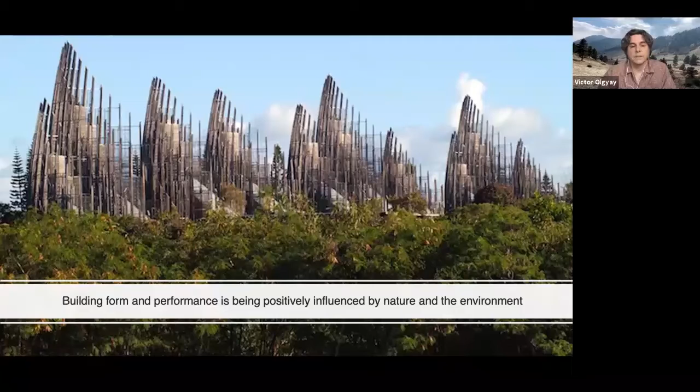Buildings have started to really be positively influenced by nature. We see lots of exciting architecture coming that is formally influenced, that has higher performance, that basically is a kind of evolution, in some sense, from this mid-century modernism, when we're understanding how we can actually take advantage of those connections. But that's not all, really. And individual buildings still can have issues.

This is actually the building where my office is. I haven't been in there for a few months, but Boulder Commons, it's about a 100,000 square foot office, and it's a net zero energy building here in Boulder, Colorado. And you'd think, oh, it's a net zero energy building. That's great, and it is. But it also can have negative impacts, and I'd like to talk about that a little bit.

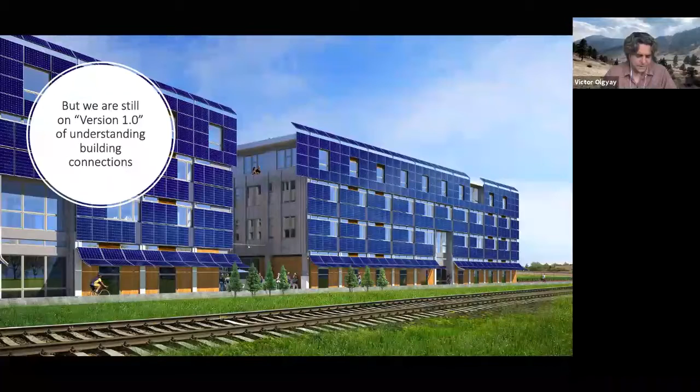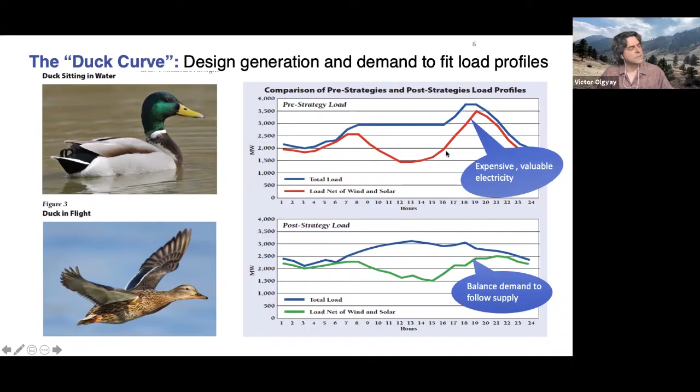Overall, it's a big opportunity for us to balance our building demand to follow supply. So it's operating your building effectively to ensure that you're not causing more problems. So this red line is really sometimes what we see as an issue with net zero energy buildings. And what we're saying is that those buildings need to be a little bit more aware of their connections to the larger utility grid.

So here's another way of looking at this concept. And when we start to connect to the utility grid, we sometimes call these grid interactive efficient buildings, or GEBs. And what GEBs do is they have buildings work as an extension of the utility, as an asset to the grid.

So this might seem just like a nice thing, like, yeah, let's be nice to the grid. But it really can have huge impacts in terms of our funding. We did a study for the GSA, the General Services Administration, the nation's largest landlord. And we showed that there could be around $100 million in annual cost savings, basically about a third of the GSA's annual energy spend, with less than a 4-year payback, just by taking some of these grid interactivity things into account.

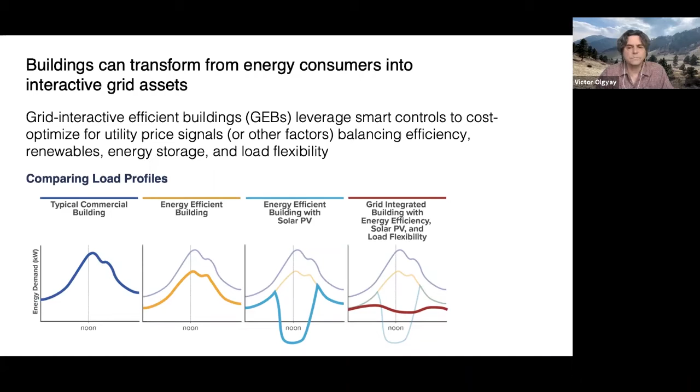So there's resiliency benefits, there's benefits in terms of reduced carbon costs. There's just a lot of quantitative measures as well as general benefits. So let's take a look at this quickly. It can be a source of income. It can help the grid run more smoothly and provide all kinds of different services to the grid. Things even like frequency regulation, spinning reserves, but really that demand flexibility and storage piece is the key right now in terms of costs and being able to make money off of it.

And then in addition, it can also help with the decarbonization of the grid. And these grid services are just one part of the overall architecture. And I think a lot of times people think of solar buildings or green buildings as a separate type of animal, as it were. But really, the key is going back to the Ray and Charles Eames thing of integration, right? It should be part of this synthetic way of looking at things. And that's the way the most benefits happen, both to the occupants, the different stakeholders, and also to the architecture itself. So take that integrated design approach.

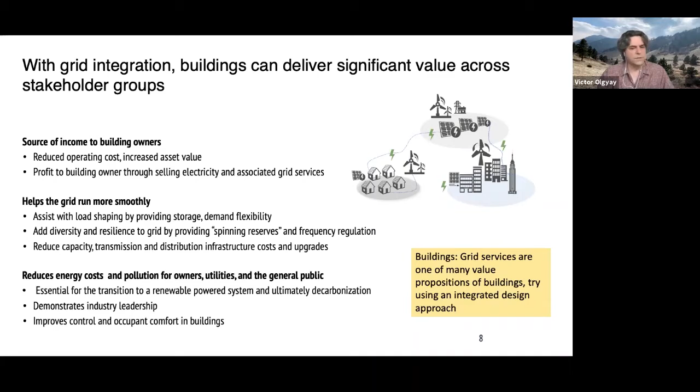So we can actually operate our buildings in a way that by when you purchase the electricity, you actually are purchasing lower carbon electricity, and you can influence the amount of carbon on the electrical grid. This comes from WattTime, but there are other players as well in this field. And it's a really interesting thing to try and coordinate the emissions along with the demand side.

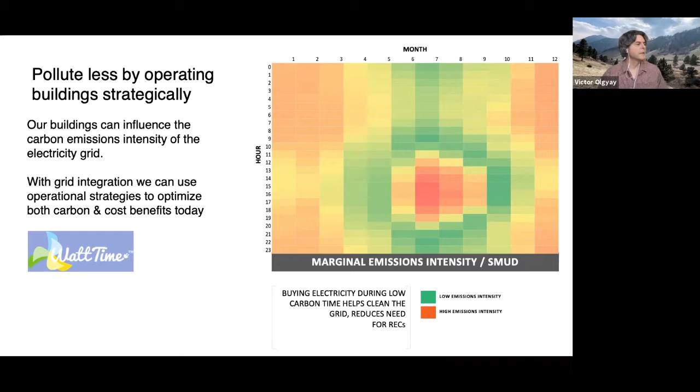So the cost and emissions don't always coincide, but you can get 80, 90% correlation and really optimize for both of those concerns. So how does this apply to us? Well, we can actually take individual buildings and put them together into communities, as is obvious, and then try to optimize the performance of those communities.

So how do we talk about these connected communities? Well, grid interactive and efficient, so they can kind of modulate their energy use. They connect with these other grid services. So not only do they do it, but they actually work with utility, have different kinds of distributed renewable energy generation and storage and so forth. And then they are optimized over the group of buildings.

So it's not just 20 buildings, each one individually kind of working, but it's building A and B working with building C and D in order to optimize across those smaller sets of buildings to even further get benefits in terms of flexibility and renewable energy generation. Sometimes they employ shared systems, especially thermal plants or energy storage. And that often helps if it's a geographically contiguous system, but it can also happen through a portfolio of distributed buildings as well.

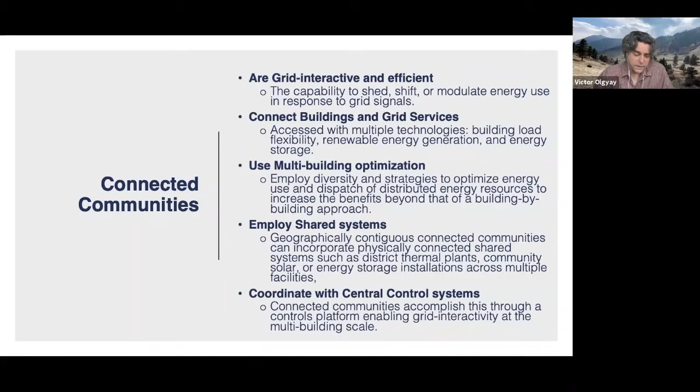And then finally, the issue of having smartness or intelligence and data connecting these buildings is critical. And this is starting to become an area where we see a lot of development, with these different control platforms that enable this multi-building grid interactivity and optimization. So not all connected communities have all of these things, but most of them have a few of them. And we're going to take a look at a few of them.

So I've got 9 case studies that I'm going to go through. Some of them are really short, some of them are a little bit more detailed, but they all talk to different aspects. We'll talk about connecting to site resources, to grid services, connecting buildings to refurbishment cycles over time, so when to actually do renovations, connecting to mobility, and then centralized resources with Hazelwood Green.

So the first 3 are kind of residential. And you might know of this project, which is here in Colorado, Fort Collins. It's a nice little residential project, pretty much completed. It's a new development, market rate, and net zero energy. So they basically have highly efficient buildings with solar PV, as well as with ground source heat pumps. The site plan is pretty dense. It's a mixture of single family houses with row houses and multifamily buildings.

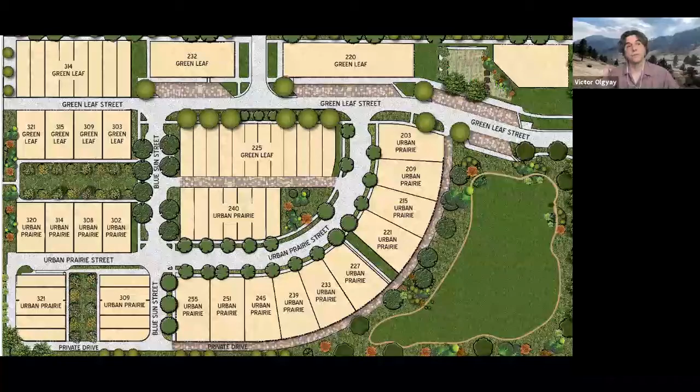It's got pretty good performance. They, I think, are typically a negative HERS rating. So those of you who know about the home energy rating system, most codes require you to get a certain level of efficiency based on a HERS rating, depending on the size of your house and so forth. These are negatives, which means they're actually producing more energy than they use over the course of a year.

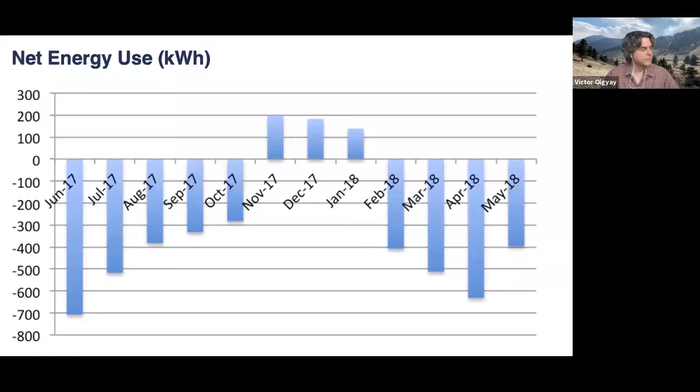This is actual data from a couple of years ago. And you can see it's using a little bit of energy in the wintertime, but basically the rest of the year it's producing more energy than it's using. So I think it's a negative HERS rating of about 8. Not huge, but definitely better than net zero.

And then the economics actually work out well also. So with the increase of cost that's required to get these buildings to net zero, increased insulation, better windows, air-to-air heat exchangers, things like that, there's some cost associated with that. And that got rolled into the mortgage payment, with solar and some other things. And the increase in the mortgage payment is actually less than the overall amount of energy savings over the course of a year or a month.

And I think this is a critical point, that a lot of times we look at costs either on a first cost basis or on a very short-term basis or isolated from the other benefits. And I think a lot of times we can make all of these high-performance buildings very cost-effective by looking at it in a more integrated approach. And I think as architects, that's our strength, not necessarily the engineering side of it, but the idea of starting to understand how we can make these connections across different disciplines in order to make things pencil out.

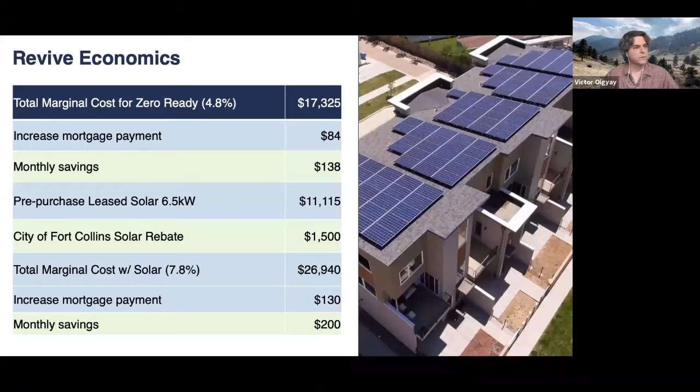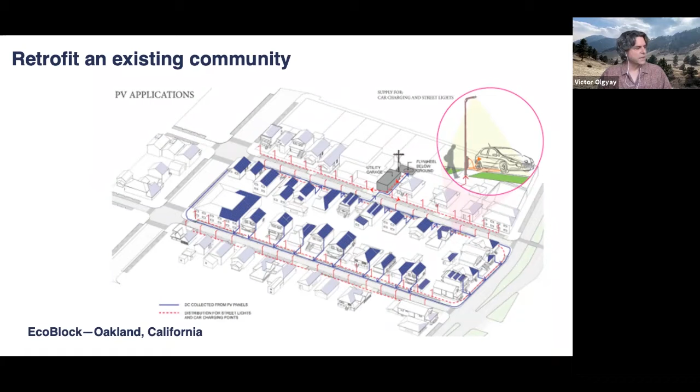Take another look at an existing community here. This is EcoBlock in Oakland, California. It has not been built, but it's a really interesting study of taking typical blocks in California and adding distributed solar PV with some centralized resources, in this case, energy storage. Similarly with water, there's a kind of ganging of the water systems, rainwater catchment, and also with the wastewater.

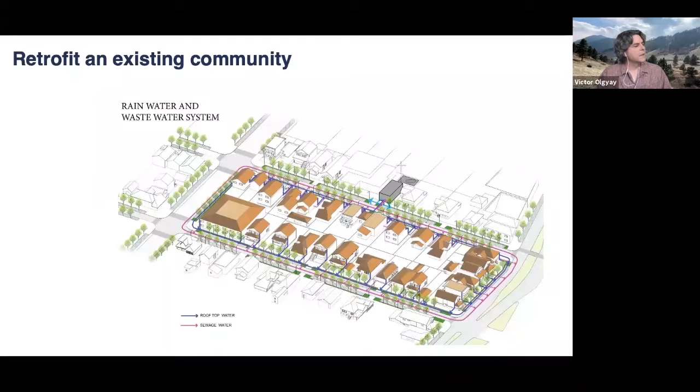And then these all get folded together into a community where you first reduce all of the loads through efficiency and insulation and electrification, but then you're also able to add in additional things like charging for electric vehicles and other centralized energy storage and so forth. And so by doing this in this larger context, it can be done quite cost effectively.

And again, I think what's critical here is this is being applied to existing communities. Since we have such a large number of existing communities, it's critical that we start to understand how we can apply a lot of these smart, connected approaches to that infrastructure that we already have.

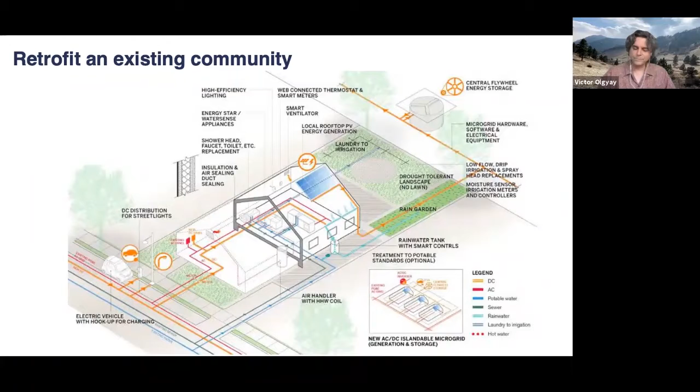Now, this last residential community group, I think, is my favorite at the moment, which is up in Basalt here in Colorado. It's being built. They're super affordable. I believe Habitat for Humanity, there's many of them. And they're pretty straightforward. They're just really high efficiency houses with heat recovery ventilators and cold climate heat pumps. They have PV on them, and they have battery storage, EV chargers, and so forth, a lot of fairly standard stuff.

The part that's really interesting is that they also are connected with a system. I think Holy Cross is the utility up there, and Holy Cross is trying to get their electricity grid to be decarbonized as well. And this is part of it because they can shift loads with these buildings because of the storage and because of these controls, and basically help balance their grid. Now it's a small amount, right?

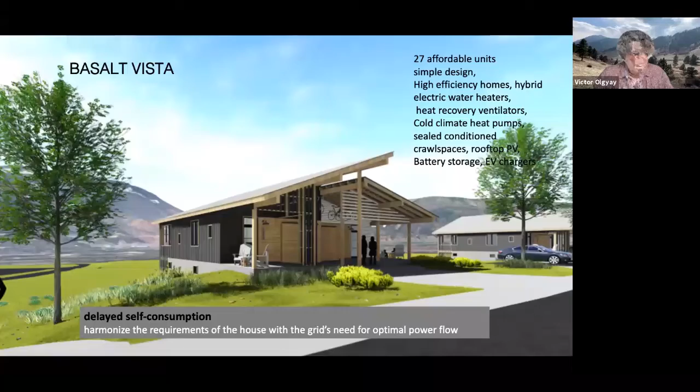These are 27 units out of, I have no idea how many buildings they have in their system, but this is a way of starting to have these buildings be a positive, interactive grid asset, a distributed energy resource, and it's able to use these houses, this residential development, to harmonize with the larger grid. I think it's a really good example of what we can imagine coming more in the future.

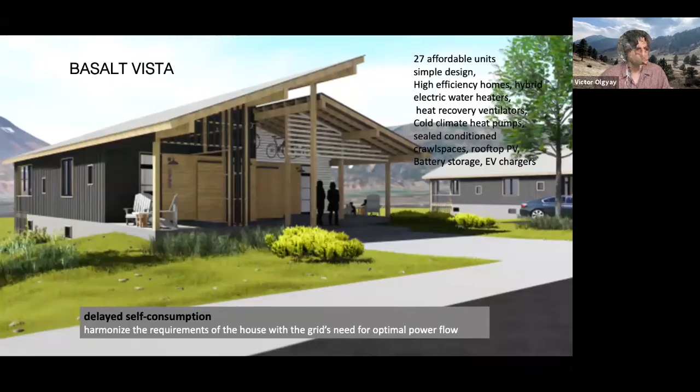So I'm going to now start to talk about some of these other grid services. Here's two projects that are in process. Pena Station is one that many of you probably know as you've driven to the airport. It's this big covered parking lot that is pretty visible, and also is a great place to park if you're going away on the plane. And you can plug in your vehicle and it'll be charged when you get back.

It's also got a large microgrid there, and it's particularly interesting because the support through the batteries and the solar and the microgrid was enough that Xcel Energy was able to avoid the capital cost of building an electrical substation because of all of this other grid infrastructure. So all of the interesting bits that we've been talking about in terms of buildings as an asset to the grid are manifest here quite explicitly.

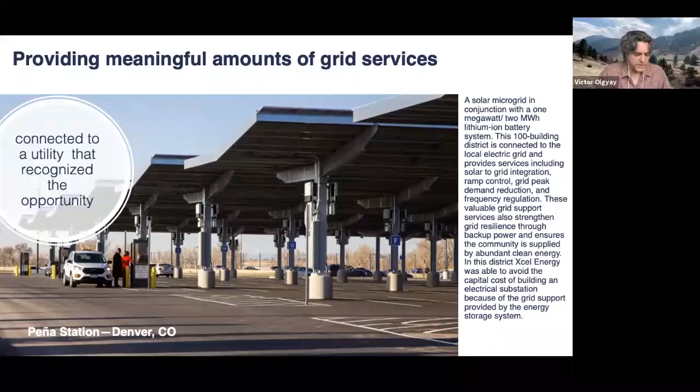These are what those batteries look like. There's, I think, about a 1.5 megawatt PV system and 2 megawatt hours of lithium ion batteries here that you're seeing. It basically is providing clean energy. As you know, they're building out a lot of the residential communities behind there. I think eventually it's probably about 400 acres and 100 buildings or so.

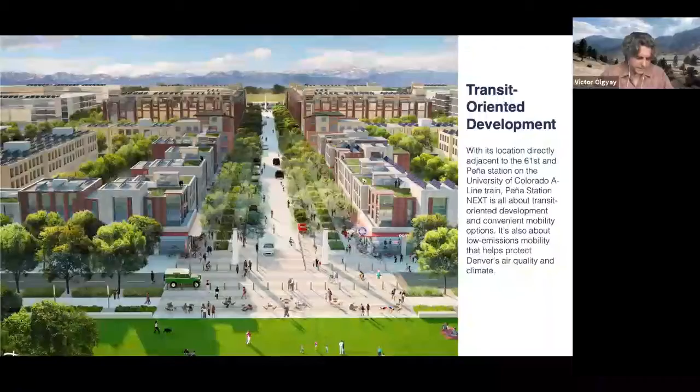And it's a transit-oriented development, which ends up being, of course, critical. It's nice that there's a light rail stop right there. Of course, if anybody was flying, you could fly from there. And you can get downtown very easily as well. So walkable and lots of good public services available. And transit is critical, making that connection.

In Georgia Tech, there's this Georgia Tech Flex project, which is just going on now. DOE, NREL, and Rocky Mountain Institute are collaborating on this along with Georgia Power. And the idea is to take, again, 18 existing buildings and start to understand how we can optimize their energy use, both for benefit to the client, Georgia Tech, but also for benefit to Georgia Power, the utility. And so it's quite interesting.

One of the things that's coming up as an important issue is that those buildings have diversity. So there's some buildings there like the Kendeda Building, which is a net zero Living Building Challenge certified building, very high performance. And there are other residential buildings that are fairly typical dormitory type buildings. There's classrooms, labs, all kinds of stuff. And the diversity of loads actually helps us think a lot about how these things can get balanced out.

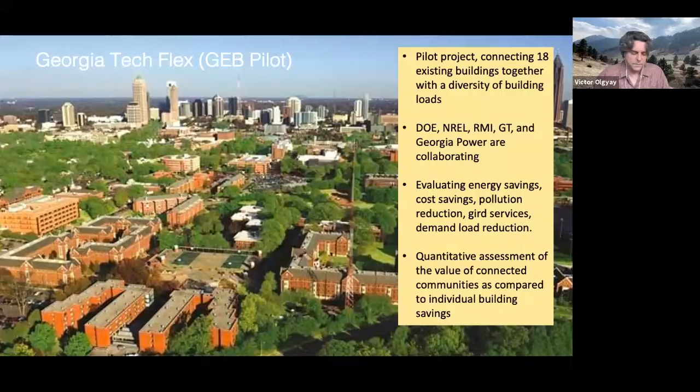Zero over time is, I think, again, an interesting way of thinking about existing communities and how can we make them part of the solution. So the idea here is that we have so many existing buildings, and how can we actually retrofit them most cost effectively? So one approach to this is to look at buildings when there is actually a need for capital investment of some sort.

So oftentimes when a lease turns over, you're going to go ahead and do some tenant fit out, or if it's sold, there's oftentimes changes that happen, or if there's some larger capital improvement that's necessary because of a system failing, and needs a new water heater, you need a new roof, whatever it is. Those are also times to start thinking about efficiency and building that in.

So if you plan for that, as your building ages and suddenly there's a new tenant that comes in, or there's a need for a major equipment replacement, and you've planned for that, then you don't replace that piece of equipment with the same thing, but maybe you actually are able to electrify your building at that time and go with a heat pump, or maybe at the time that you're doing the tenant fit out, you can actually go ahead and insulate walls or switch out for better windows.

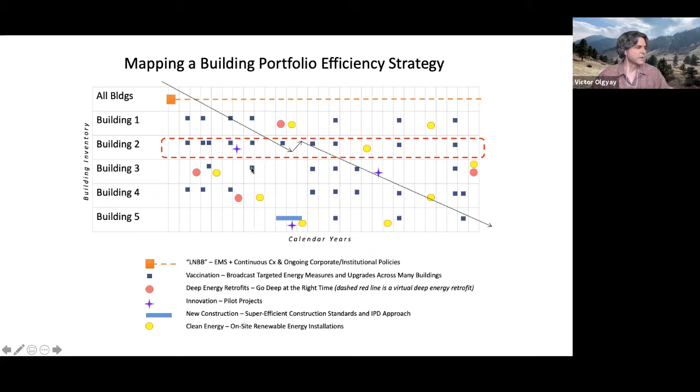So here at Arizona State University, they have these really ambitious goals, getting to climate neutrality by 2025. We worked on this project about 5 years ago, so they're well into it now. And they wanted to get to climate neutrality by 2035. So they took this approach of looking at zero over time and understanding when there was a building that would be a deep energy retrofit, when we're going to add solar, when we're just basically going ahead and doing some regular upgrades. And over time, we were able to show that this would be the most cost-effective way to do it.

So this first bar shows business as usual. The second is no energy efficiency, just adding renewable energy as you move along. The third one is doing all of those things of efficiency and so forth, but not necessarily coordinating it with the end of life of our equipment or other kinds of trigger events that allow for efficiency. So if we look at that zero over time scenario, we found that that's actually the most cost-effective, more cost-effective than business as usual, and also gives you a positive ROI, net present value. So it really makes a lot of sense.

Of course planning is typically a good thing, but especially when you've got a large campus like Arizona State University, and you're trying to have these big goals of getting to climate neutrality, and you want to do it cost effectively, you can actually design your building infrastructure and maintenance to be coordinated with your climate goals in such a way that it actually benefits both of those. So it's a very nice way of doing it.

Last thing I'd say about ASU is that they're doing most of this through an energy service provider model. And so what happens is the energy service provider has a guaranteed cost and return, and they basically have first right of refusal on these projects, and be it a renewable energy project or a building efficiency project, they can go in there and they can make money on it at the same time as ASU is benefiting as well by reduced costs and reduced pollution.

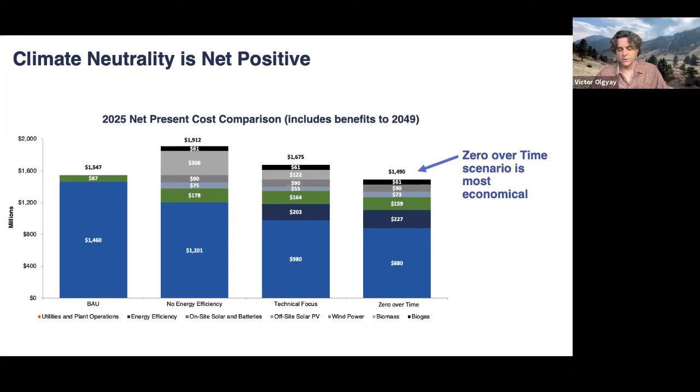We've also applied this to some work that we've been doing with the city of Pittsburgh. They also have fairly aggressive energy goals, in this case wanting to get their municipal buildings to zero carbon by the year 2030. So be it for better or worse, they have a big portfolio of, I don't know, 150 or so municipal buildings that are really not in a great state of repair. So they all do need to be invested in. And the question is, how much can they invest at what time?

But what we tried to do is, again, coordinate that investment with efficiency improvements, and also require that they don't do it based on kind of lowest first cost. They really want to be able to do this based on a life cycle cost. So we ended up with a scenario that looks like this, where this top slightly sloping line indicates the business as usual case, right? That would be essentially how much CO2 would be produced with marginal improvements in efficiency.

You're switching out lighting, or when a rooftop unit fails, you're putting in kind of the typical model. So there'd be slight improvements, but really not getting anywhere near what they needed to get to by 2030. This bottom sloping curved line is actually trying to coordinate efficiency improvements, and this is bringing the buildings essentially up to net zero ready, which we defined through the Architecture 2030 standards, which AIA has also used in terms of efficiency for the energy use intensity for all of these buildings.

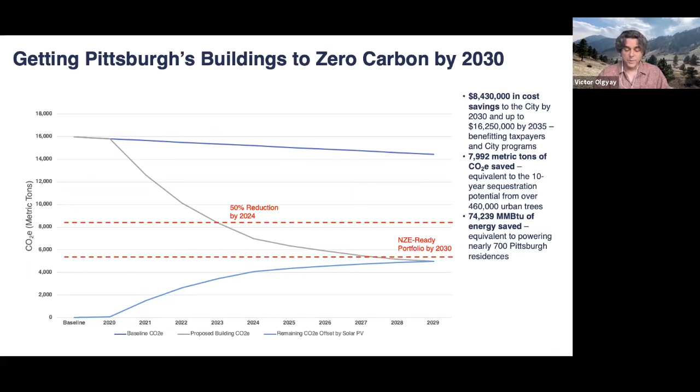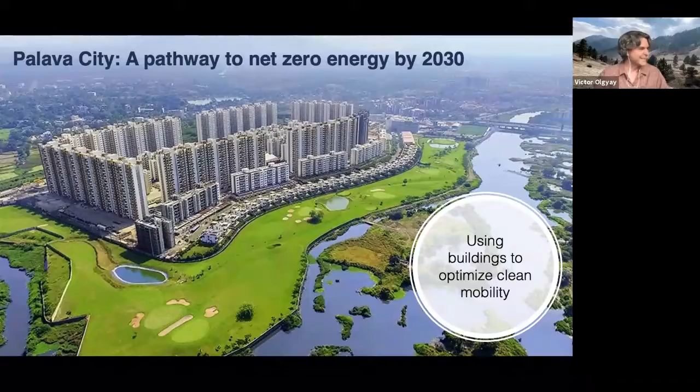Two more projects I want to talk about. This one in India is really interesting, especially because mobility ended up being a surprisingly big impact for me when we were working on this. So this project, you'd think, wow, that's some kind of Corbusian nightmare, but it's actually a lot better than much of the infrastructure there. And it turns out people in India don't like commuting any more than the rest of us. And being stuck in the traffic in Mumbai is just something you don't want to have to do on a daily basis. So if you can reduce the amount of commuting that you need to do, that's really great.

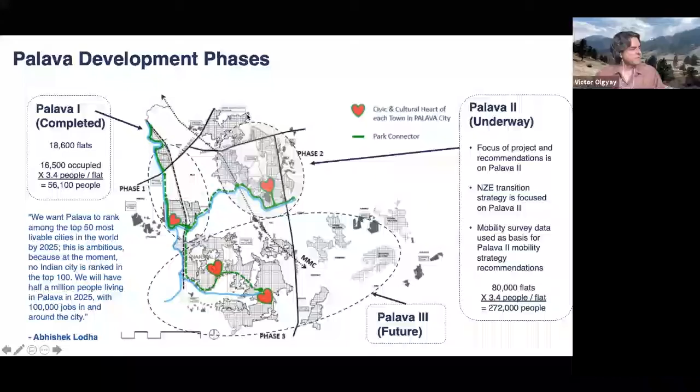This new development is about a 4,000 acre new city that's being built pretty close to Mumbai. It's almost kind of on the suburbs of it. And it's just being built out really rapidly. It's got 3 phases to it. The first phase is complete. We were focusing on the second phase, and the third phase is on its way. They own all this land. And so the focus of this was on the second phase.

And in the second phase, we looked really at the urban design and how this can actually become a better, more transit-oriented, sort of low-impact development. And so a lot of these things are not particularly surprising. I think they're things we all know about, but what was surprising again to me was the impact.

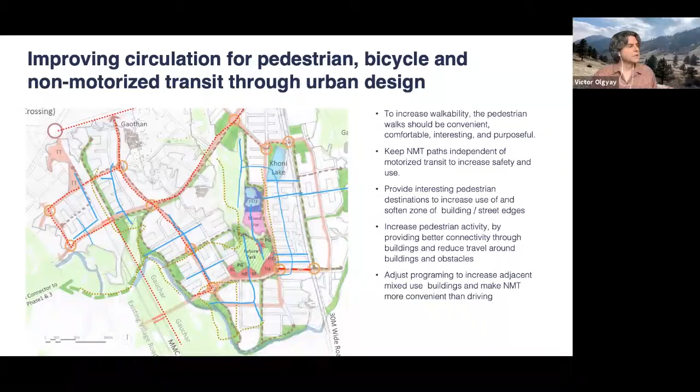So, we made nice pedestrian walkways. We basically tried to reduce the amount of motorized transit. We had more electrification of vehicles. We just made it more convenient. And from a programming perspective, we tried to have as much work and residential work-live spaces as possible. So we kind of tried to make it a self-contained place to a large degree that didn't require leaving Palava.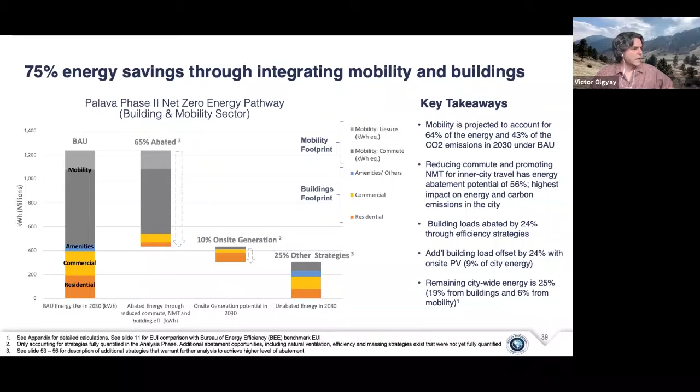So this is showing first overall the amount of energy that's used, and this gray bar is the mobility, and we were able to reduce that mobility significantly. And then we're also reducing the energy used for commercial and residential buildings, added on-site generation, and we were still left with some other strategies that needed to be employed. But mobility is more than half, like 64% of the energy use and CO2 emissions. Well, 43% of the CO2 emissions.

So here's the approaches that we took in terms of mobility. Increased walkability and bicycling, more layout of the city that improves the non-motorized transit. Lots of electrification of vehicles, both the three-wheelers and two-wheelers, as well as the automobiles, providing charging infrastructure and so forth, providing better long-distance commuting into the city for those people that needed that.

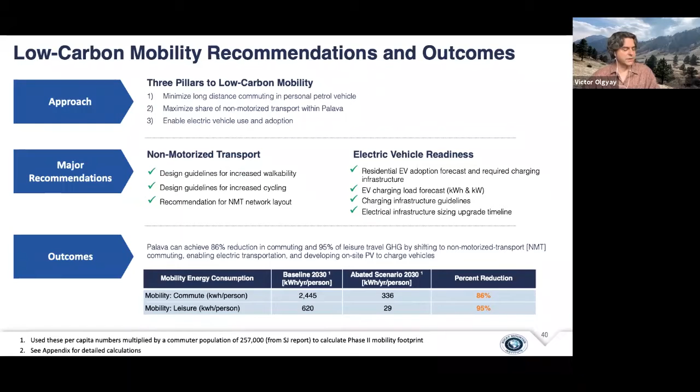And we were able to predict leisure mobility coming down by 95% in terms of the amount of pollution, and a lot of that's through electrification, and the commuting coming down by 86%, and a lot of that has to do with the work-live kind of scenarios. So we reduced the amount of commuting that was required.

Last idea here is this one here in the US, Pittsburgh, Hazelwood Green. And Hazelwood Green is really kind of exciting. It's a 180-acre former steel mill site, so a brownfield site. And they wanted to do this mixed-use development, but they're really frightened about the first costs, and they're concerned about making it affordable for Pittsburgh. Pittsburgh is not Denver. It's not a place that has skyrocketing real estate prices. So the economics are a lot different.

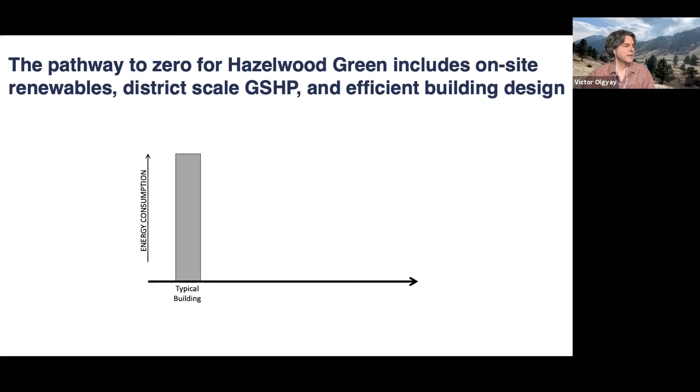So yeah, we were told it was unachievable. What we ended up doing was looking at a centralized utility on this site that allowed us to share some of that infrastructure. And we'll talk about that integrated energy service provider. So basically the way that we did this, it's pretty straightforward. That's a typical building, and we added renewable energy. We had this district system of ground source heat pumps, and then we had building efficiency, and that gets us to our net zero approach.

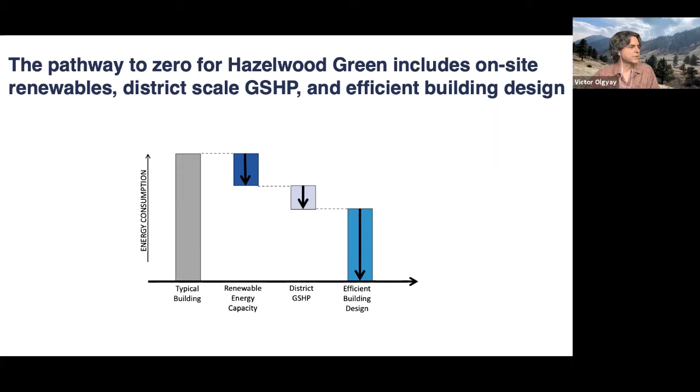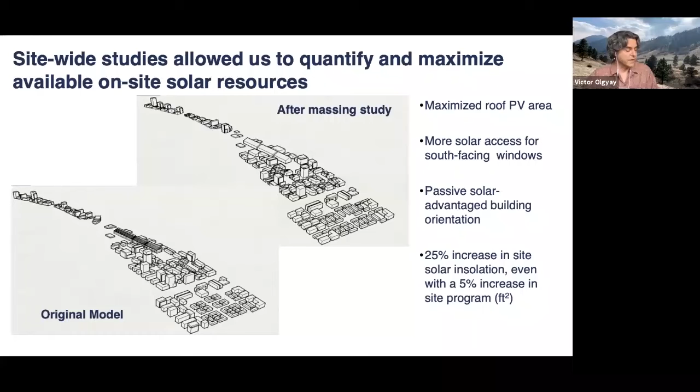We looked at the building massing, and these two massing diagrams may look very similar, but by actually doing solar orientation and envelope design, we were able to increase the insolation, basically the sunlight available on rooftops and on southern facades, by about 25%, while simultaneously increasing the density on the site. So this is to try and prove that idea that it really does make a difference from an urban design perspective, how you're shading or not shading your buildings. That's something that, as designers, we can have a huge impact on.

When we looked at all the different parcels on this site, there were some that never would be able to be net zero, tall buildings with small amounts of solar. And then there were some that would easily overproduce, parking garages and so forth. So overall, it looked like it would be possible to have an energy balance across the site. And what we did was we found places where buildings produce more energy than they need, other areas that used more energy than they produced, and basically you move the energy around. So this is that sort of connection. And if there's even more energy than we need, that can also benefit the adjacent communities.

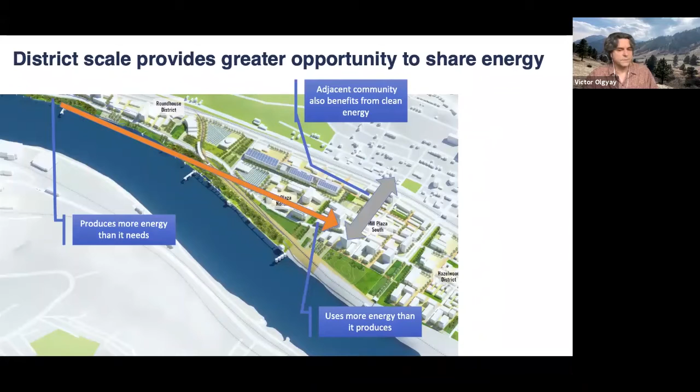So understanding that from a thermal as well as an electrical perspective was key to making this cost effective. So this idea of the IESP, or Integrated Energy Service Provider, was key to making this cost effective. So the IESP acts as almost a little utility on site, and they are able to basically get income through all of these different services they provide: operations and maintenance, thermal energy, electricity, basically working with the grid and the utility. And they provide capital, and then they get these long-term returns.

So it's not a huge amount of money, but it's very steady, and it's a good investment. So there's actually a lot of people interested in exactly this type of business proposition. What does it do? Well, here you have the cost of a typical building, and the cost of a net zero building is slightly more, but all of these pieces are taken by the IESP, and they take that first cost essentially out of there, and they're financing that for us. So then we've got this reduced cost for the net zero energy building, and yet it's likely to be more valuable than a typical building.

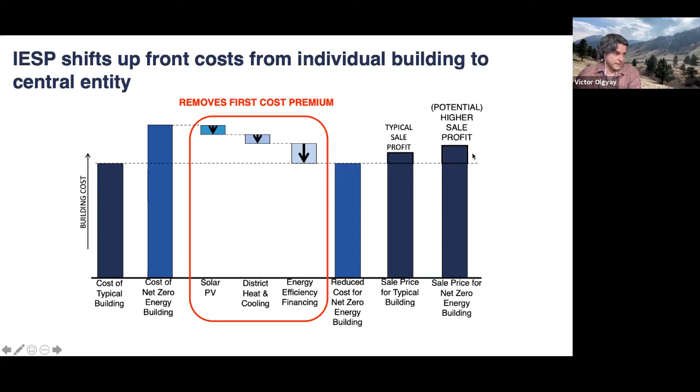So the IESP gets those revenues back by basically getting the electricity bill and heating and cooling and on-bill loan repayment services. And those add up to less than a typical energy bill would be for a building occupant. So it's a clever way of trying to aggregate a lot of these different revenue streams that benefit both this IESP services provider as well as the occupants.

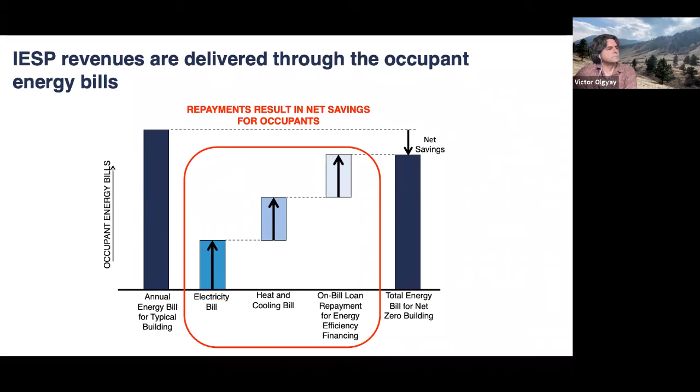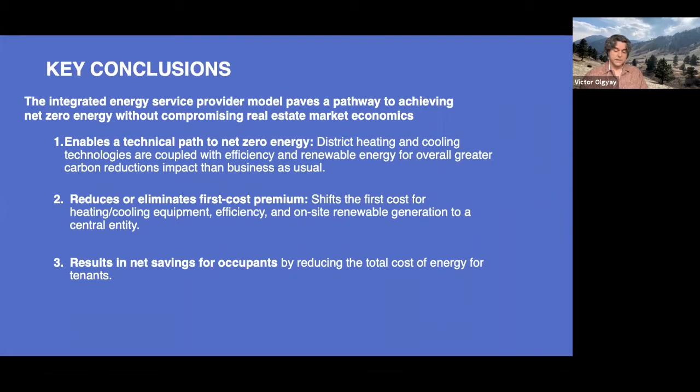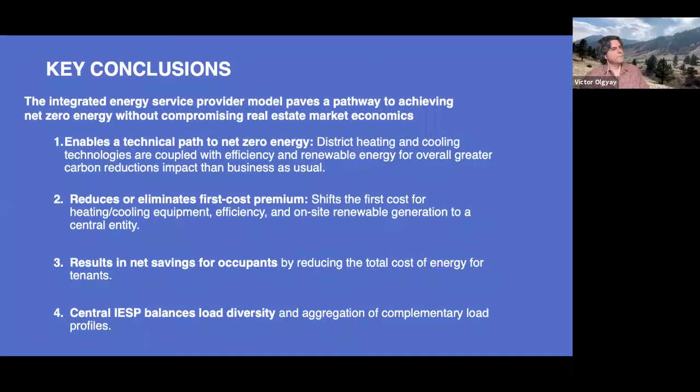So the conclusions there are, this is one way of making the economics work in one of these more connected communities with shared infrastructure and services. It's a technical path to getting to net zero energy. It reduces that first cost premium, which is oftentimes a deal killer. And it's a net savings for the occupants. So that should hopefully make these more viable in the community in terms of sales. And then overall, it's doing what we need to do in terms of making the utility and the architecture work together in a complementary way. So it's a really interesting way, and I think we need to continue to explore this kind of approach.

So, architects, designers, this is our big opportunity, right? We can profitably create these NZE districts. It's pretty straightforward stuff I've been telling you. Insulate, make these buildings efficient, electrify them, add renewable energy, make sure you've got the transit-oriented development working for you. And then this new piece, which is starting to think about connecting shared resources and coordinating across groups of buildings. And by doing this, we can start to help design this climate positive future.

And these can be big, right? Because as you know, the next 10 years are critical for us to reach our climate goals. The time is now, and we have everything we need to do this, right? We have the technology, we have the knowledge, we even have the economics on our side, right? We can make money doing this. So that's typically been the thing that has stopped people. I think the last thing we need is the will to do it. And I actually think we have that now too. I really do think that there's a change in the weather where people really want to do this.

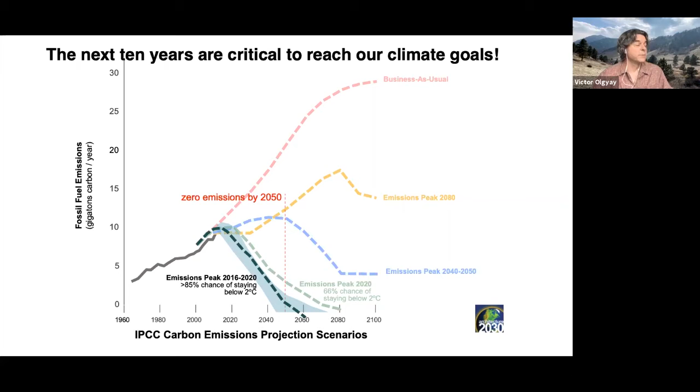And so this diagram comes from Architecture 2030. It's based on the International Energy Agency's work and the IPCC projections on climate. But this next 10 years, we have to turn the corner and aim towards zero emissions as soon as we can. It's a big job. And as a big job, we need to think about how we can do that. It's going to be bigger than anything we've ever seen before.